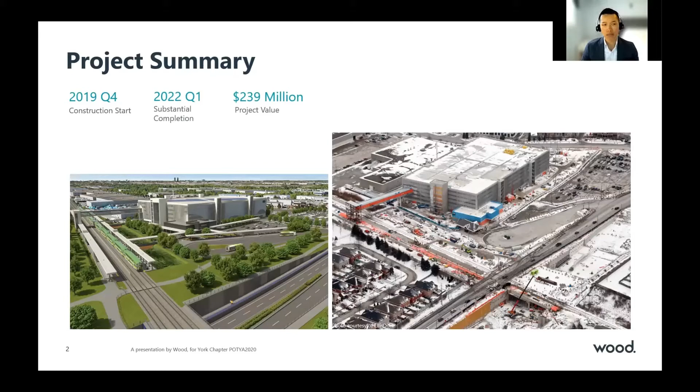Shown here is an overview of key project elements. Starting from the bottom left, there's a new parking structure with integrated station building. There's an updated parking lot layout, passenger pickup and drop-off area, and bus loop, all updated to provide ease of transition between travel modes. Again, the theme of improving and encouraging transit use is throughout.

There's a new rail bridge to separate road and rail traffic, right over here if you can see my cursor, to improve the flow of traffic along Rutherford Road, eliminating the need for vehicles to wait for trains. Adjacent to the rail bridge is a pedestrian bridge connecting the multi-use pathway on the north side directly to the station building. Along these orange lines is the multi-use pathway, and there are also on-street bike lanes, again to promote multi-use active transportation. There's a new stormwater pumping station to pump stormwater away from the depressed roadway during rain events to avoid delays on the road.

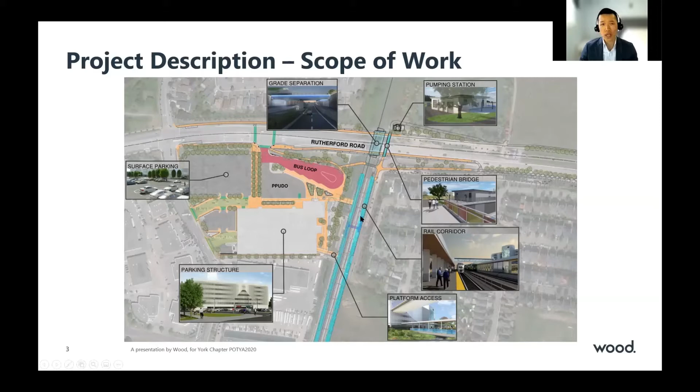Within the rail corridor, to accommodate the increase in train service, there's a new east track and a new east platform, with upgrades to the existing track and existing platform.

In terms of impact to York Region and neighboring communities, the new station improvements and grade separation will encourage use of public transit and active transportation modes, meaning taking cars off the road. This ultimately improves network capacity and connectivity, and quality of service for pedestrians, cyclists, transit users, and motorists. It also improves capacity and level of service for movement of goods along Rutherford Road.

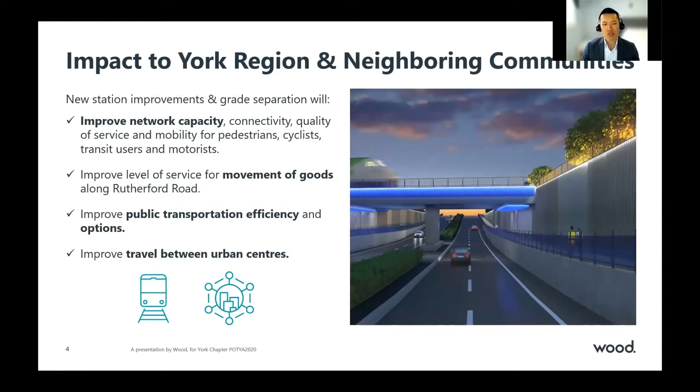Those are heavy trucks. The project will improve efficiency and options for public transportation. The increase in train service will improve travel between urban centers, essentially better connecting major cities along the Barrie Rail corridor all the way from Barrie to Toronto. By removing the existing at-grade crossing and eliminating the need for drivers to wait at the existing rail crossing, it will enhance community safety.

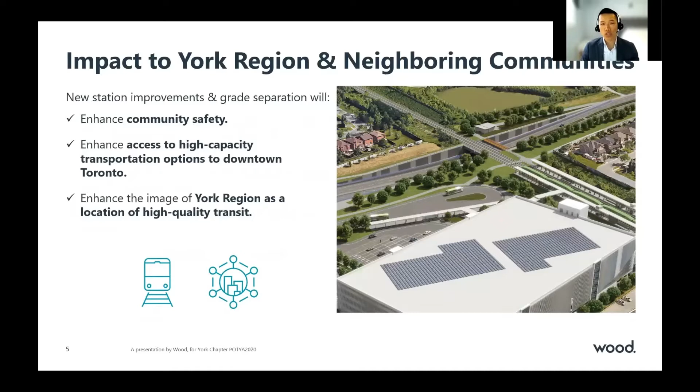This reduces potential collisions and delays to emergency vehicles. Increase in train service will enhance access to high-capacity transportation options to downtown Toronto, which means more access to jobs and growth. Overall, the project will enhance the image of York Region as a place of high-quality transit.

From an environmental and social sustainability aspect, the new station improvements and grade separation will provide safe and accessible stations that promote and encourage use of public transit and active transportation modes such as walking and biking. By reducing the number of personal automobile trips, we're moving more people with less energy, which will result in a reduction of emissions and the total number of collisions.

Also, by removing the at-grade crossing, it eliminates the need for vehicles to wait for passing trains, which enhances safety because you avoid rear-end collisions between cars and trains, and it also improves local air quality from lack of idling from cars waiting.

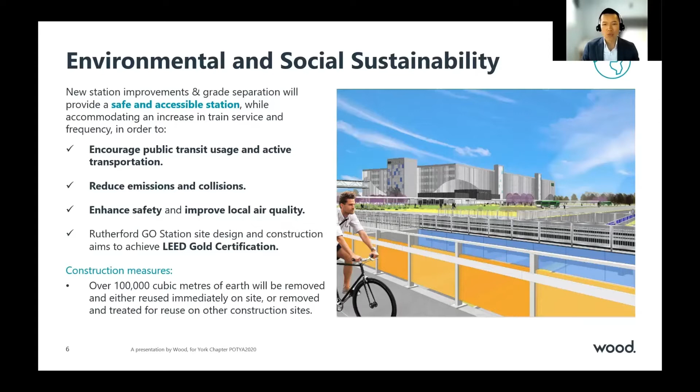The Rutherford GO Station site design and construction aim to achieve LEED Gold certification. I think we're more on track to potentially get Silver certification.

What sets this project apart from other projects of similar scope is the presence of an interlayered system of aquifers at the grade separation site. This is where we get into the technical merit and some of the innovation.

As shown on the screen, you'll see there are two aquifers. There's an upper aquifer consisting of sand and silt, and below that is a pressurized lower aquifer of sand and gravel, separated by an aquitard of silty clay. The pressurized low aquifer is sometimes referred to as an artesian aquifer.

This means the water in that aquifer is under enough pressure that when it's tapped, the water will reach the ground surface about 15 meters above. So under existing conditions, if you drill down here, the water will go all the way up to the road surface. As such, we had to optimize our design to compensate for the hydrostatic pressure, the uplift from underneath, and to avoid permanently depressurizing that lower aquifer.

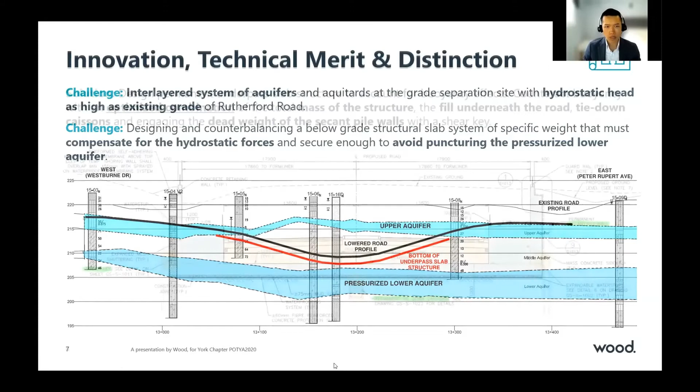One of the innovations and the technical merit we find is that to counteract buoyancy, our final design is an optimized combination of a total mass of a below-grade concrete slab structure, this tub structure here. It's inverted, so we refer to it as the tub. We also use the weight of the fill, the granular and the asphalt.

We incorporated permanent tie-down caissons to help bear the weight and resist the uplift pressure. Another final innovation was that we included shear keys to engage the weight of the secant pile walls that were originally intended for shoring for an excavation, but we designed them for permanent condition, engaging that weight to help resist the uplift.

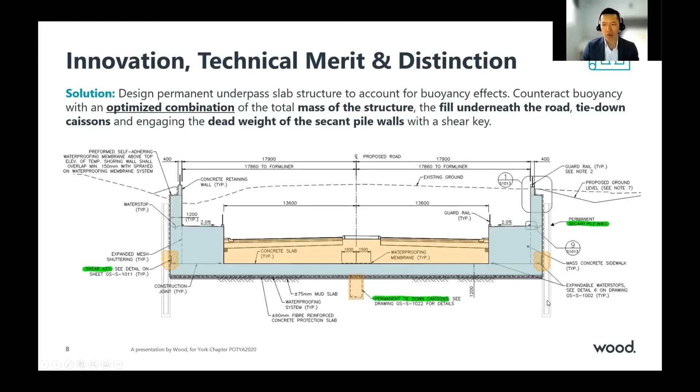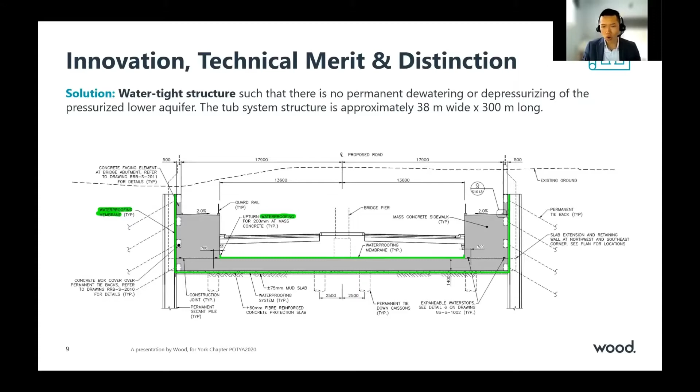So you can imagine, from the bridge out, 150 meters on either side of the bridge, is this tub structure. At the end, there are two vertical walls going straight up that prevent any water from going into the tub from below or from the side. The overall tub structure is approximately 38 meters wide to accommodate the new roadway, and it's about 300 meters long.

There's a quick video here showing the construction approach. It's actually a video rendering completed by Metrolinx. It's quick, so I'll try to go through it here.

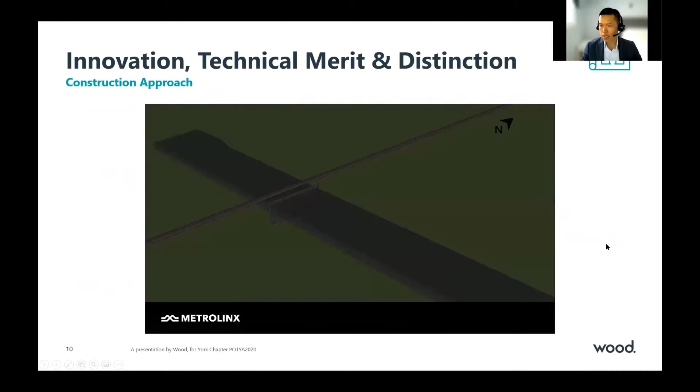As you can see, this is the site. The first step is the shoring system. Concrete piles are drilled to form the secant shoring to support the excavation, starting on the east side moving to the west, and you can see all the excavators working fast to excavate.

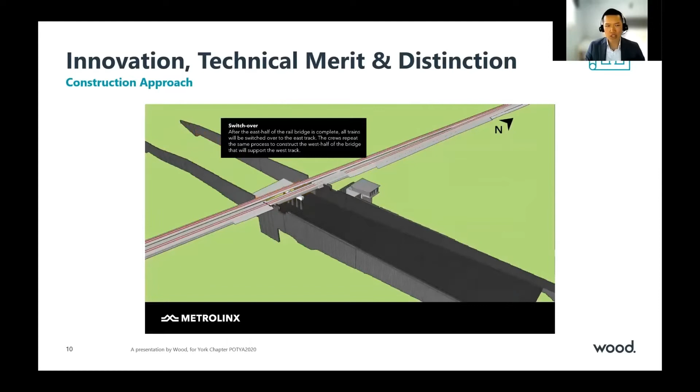At the same time, the rail bridge is being constructed. We install caissons for the bridge, form the abutments and piers. Excavation happens, and we construct the underpass slab structure, which is the black area and the gray you see there, with the uplift wall. Then the train traffic switches to the east.

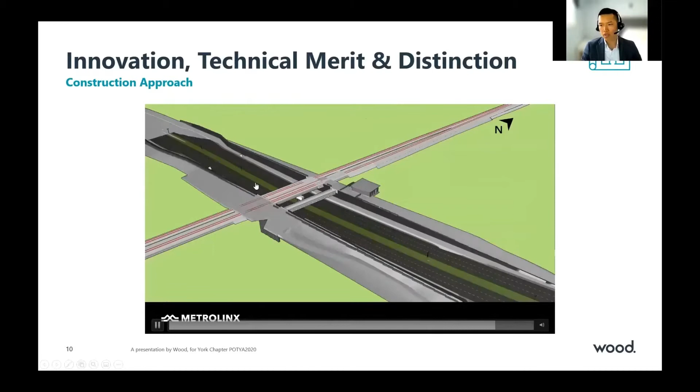The whole process is repeated on the west side. Pedestrian bridge built, road built. See? Two years of construction in 40 seconds.

A couple of videos here of current status. We have caissons, if you can see here my cursor - these are the drilled caissons that support the slab. This is all the reinforcing bar for the underpass slab, that tub that you'll see.

Here is some progress overview of the tub. Here you see the secant walls on either side. The enclosed area here is where the shear key is being formed.

In terms of commercial viability, the new station improvements and grade separation will accommodate an increase in train service and frequency, which help promote public transit use, and the grade separation will eliminate congestion at the existing at-grade road and rail crossing. Increasing train service will increase transportation capacity to support access for the growing communities in the surrounding areas. There's a lot of congestion within York Region along all the east-west throughways in the corridor.

And it's not always feasible to build more roads to expand the highway. We can't just add another highway. So what Metrolinx has found is that expanding the GO network, where there is property and room, is probably the most cost-effective way to increase transportation capacity versus widening or building more roadway. Because as you increase transit services, you get more cars off the road, which then builds more capacity.

As well, from a viability point of view, increased ridership will contribute to a rail system that is more self-sufficient by covering operating costs with revenue from fares.

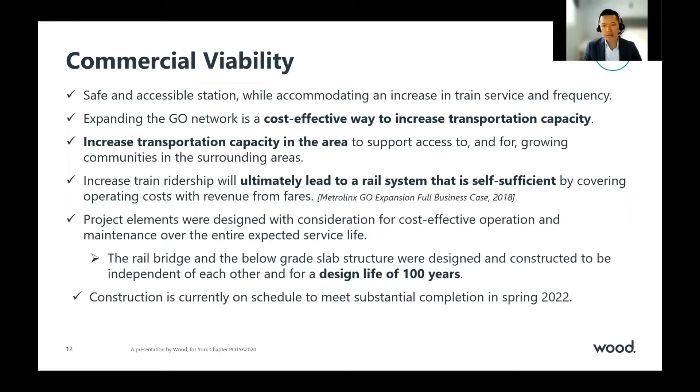Actually, just 20 seconds, I'll hit my last point: the project elements were designed with consideration for cost-effective operation. We designed the tub and the bridge independent of each other so they can be maintained separately without impacting each other, and they were designed for a life of 100 years. Thank you very much.

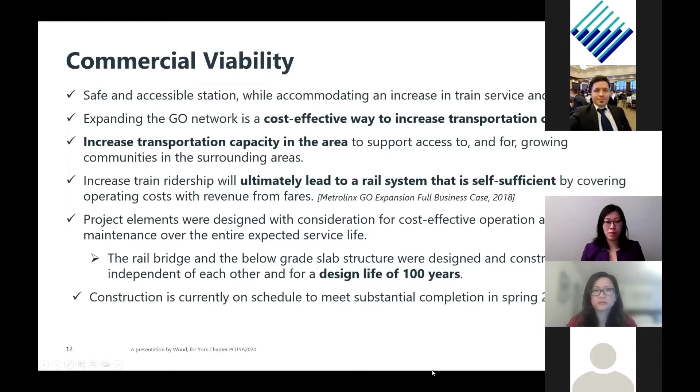John, hi, it's Marisa. Thank you so much for your presentation. I have a quick question for you. Is there any metrics that you can associate with the improved network capacity? Are there any numerical goals, or can you compare those metrics to other projects in terms of some of the improvements that will be possible because of this?

That is a great question, and from my transportation background, it is actually a very tough metric to analyze, because when you analyze an engineering metric, it's usually with very limited variables. When you have a lot of different variables combined, it is very difficult to come up with a metric. With a rail corridor, when you take people off the road, it's hard to anticipate the number of cars that can get off. Also in transportation, there's a phenomenon known as supply-induced demand—when you take cars off the road, other cars may come in as well. So we can always say we improve capacity, but it's hard to justify how much.

But from a Metrolinx number, there's a figure floating around—off the top of my head, by 2055 Metrolinx anticipates having 200 million riders on the rail corridor, and if you take that into consideration, that's a lot of cars being taken off the road. Based on that alone, it's hard to say how many of those cars are actually taken off Rutherford, or how many off the adjacent corridor, because this corridor runs from Barrie all the way down to Toronto. We don't know the aggregate effects of each of these crossings or station improvements. If someone tells you that's a set number, they're almost lying.

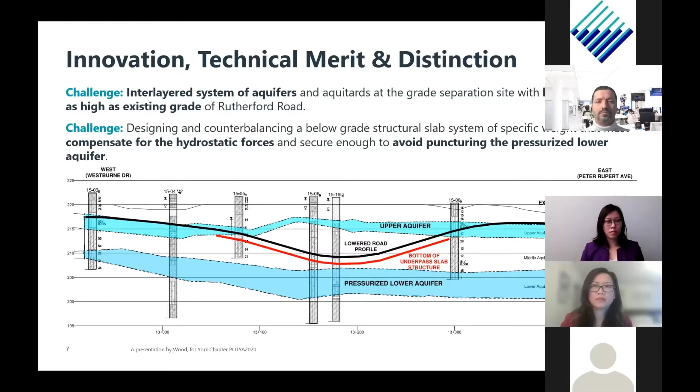So we looked at different options to minimize that risk during construction. Instead of having that 3.5 meter fill of road, we cut it down to about 2.5 meters, and reduced the tub thickness from 1.6-1.8 to 1.4. But instead, we had to incorporate these permanent tie-down caissons to help weigh down the tub, and engaged the shear key of the shoring. We haven't really seen something like this done before, but we looked at different ways to help expedite construction and reduce the risk of puncturing that lower aquifer.

At the end, we came up with about 53 of these permanent tie-down caissons spread across the length of this 300-meter tub. The caissons help resist tension and uplift to keep it down - imagine it's like an anchor. At the same time, the caisson has skin friction of the soil to also help resist uplift.

Combining all of this is an optimized combination to come up with this tub. You see this mass concrete here too - we added this multi-use pathway and made it really mass concrete for the weight to help reduce the width. The risk is you don't want to increase the depth too high either, because there's a limit on the vertical clearance between the top of the road and the bottom of the rail bridge - a minimum clearance you have to meet, and you cannot move the profile of the track. Rail has very tight restrictions on profile, so we tried our best to maintain that profile along the whole north-south.

I hope that answered your question a bit. Yes, thank you. No problem.

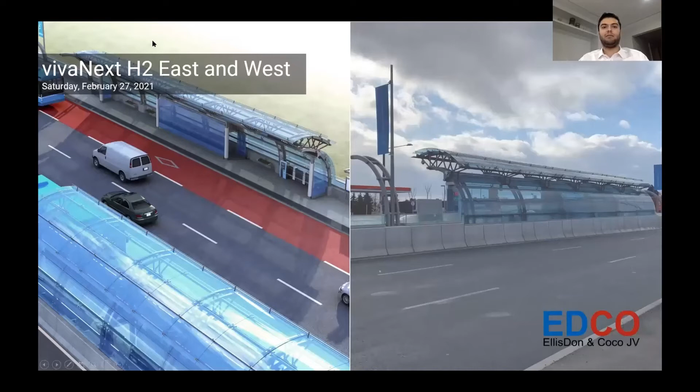I was introduced to EllisDon through an outreach event that I'll touch on later on. The vivaNext bus rapid transit H2 East and H2 West corridors of Rapidway are part of the broader vivaNext network that integrates into the transportation system, both in terms of transit operations and Viva stations, and was completed in January 2020 with a value of approximately $350 million. It was delivered under the design build finance model.

During today's presentation, I'll go over the project summary, innovation, technical merit and distinction, environmental and social sustainability, commercial viability, and the impact to York Region and neighboring communities.

Project summary. The two segments of the project site were about 5 kilometers apart and could be treated as different projects. The H2 West segment wound along Highway 7 from Helen to east of Edgeley. The H2 East segment wound along Centre Street from Highway 7 to Bathurst Street, Bathurst Street from Centre to Highway 7, and Highway 7 from Bathurst to the Yonge Connector Route.

The project consists of approximately 12 kilometers of rapidway and 10 stations. We widened multiple culverts, including the Humber River culvert under Highway 7, which required 34 bell ducts to be temporarily supported during installation. The corridor required extensive amounts of road and bridge widening to accommodate the dedicated center bus lanes. As a result, the project also involved extensive utility relocations and repairs to storm, sanitary, and water mains. Road and culvert widening and ramp realignment was also completed near the Highway 7 bridge over Highway 400 for MTO.

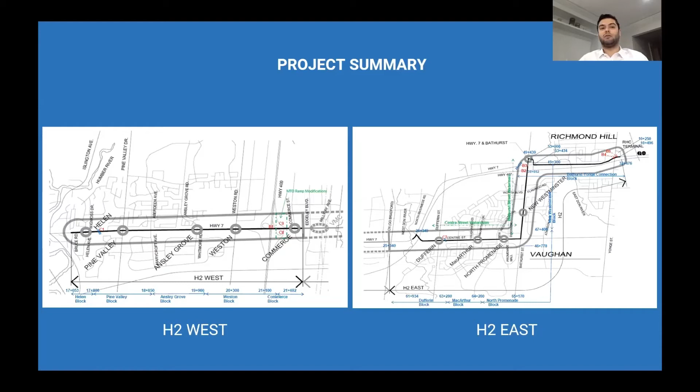In terms of innovation, technical merit, and distinction, working on this project enabled EllisDon's building sciences team to take challenges head on. Detailed traffic management plans were created as separate staging plans for each phase of the project, which required 2 live lanes of traffic for a majority of construction time.

Extensive traffic management was implemented along one of the busiest highways in North America to realign the southeast-west ramp from Highway 400 to Highway 7. We also implemented BIM to mitigate risks, especially for dry utilities. 5 utility agencies impacted by the widening works were Elexicon, Enbridge, Bell, Rogers, and TELUS. We also relocated water mains along Centre Street, Bathurst Street, and Highway 7. We were a recipient of 3 major awards, as you can see on the screen as well.

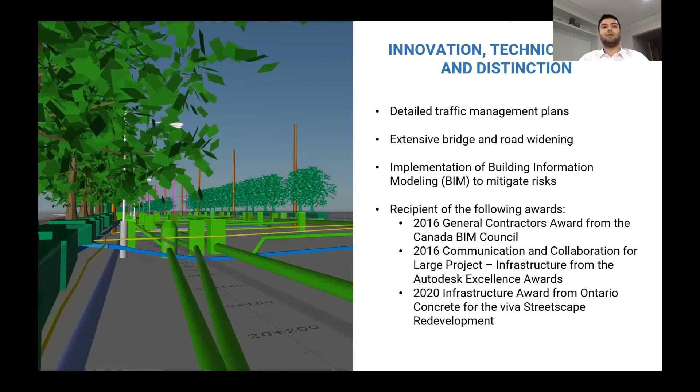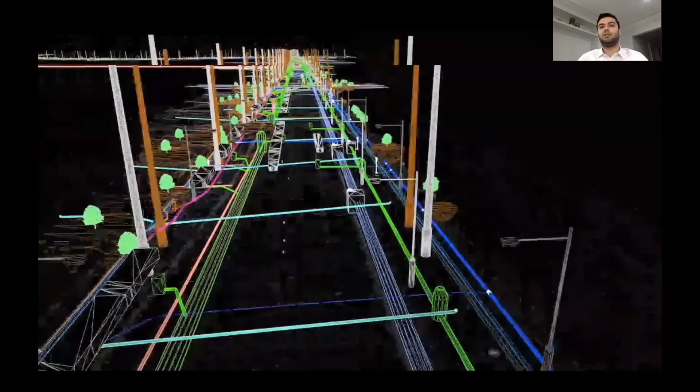This BIM video shows the H2 East segment, which starts from Centre Street and goes north on Bathurst Street. There were 1,500 test pits completed as part of the subsurface utility engineering investigation, and utilities were classified to different quality levels specified in ASCE 38-02. We modeled all the utilities to scale, introduced a standards table for clearances, and based on clash detections, the proposed alignments were finalized for the design.

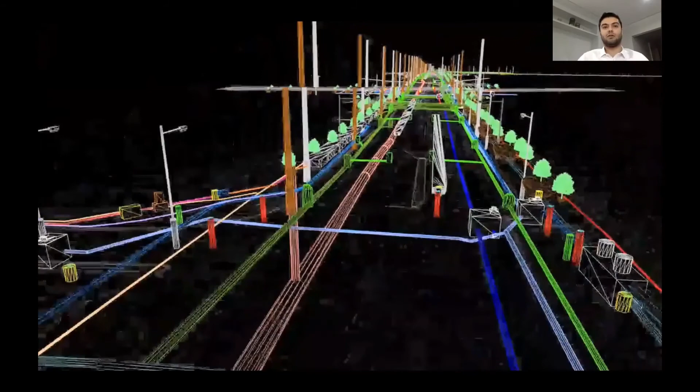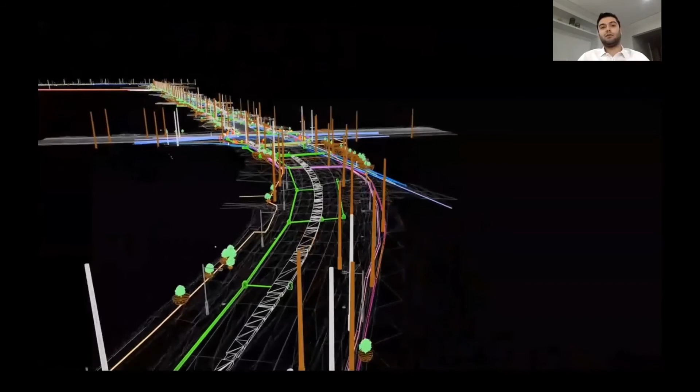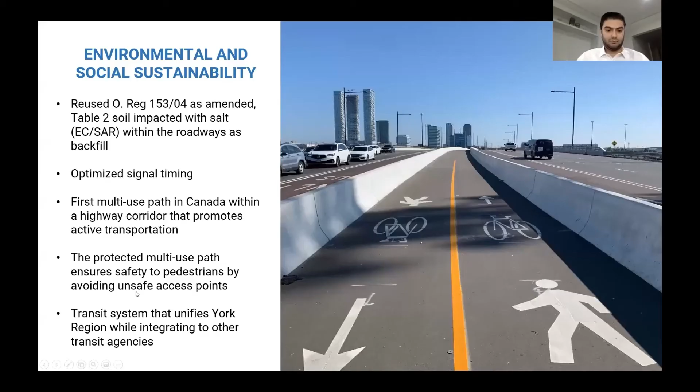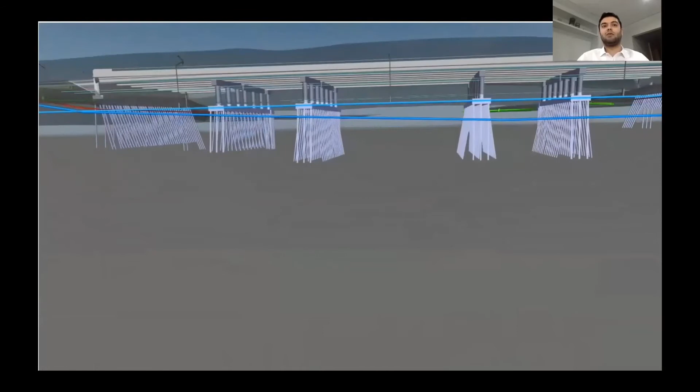The next BIM video shows the widening of Highway 7 over Highway 400. The bridge deck was extended by 10 meters with 4 new piers installed to the north, and the parapet was rebuilt on the south side to accommodate the dedicated bus lanes.

This is the widening to the north, and the strip in the middle is the multi-use path. Here's a picture of the multi-use path. In terms of environmental and social sustainability, we built the first multi-use path in Canada within a highway corridor that promotes active transportation.

The protected multi-use path ensures safety to pedestrians by avoiding unsafe access points. Previously, pedestrians would have had to cross the ramps since the sidewalks were on the north and south side.

Signal timings were optimized for the 30 intersections within the project limits in order to improve ITS within York Region. Züm Brampton Transit buses and the TTC are interconnected to the vivaNext network as a result of this program.

In terms of environmental impact, soil excavated across the project, specifically within the roadway that met the MECP Table 2 SCS, with the exception of salt, was reused within other excavated areas needing fill.

We did not treat the soil excavated as waste where there was potential to reuse it as fill across the site. This minimized the environmental impacts to the community.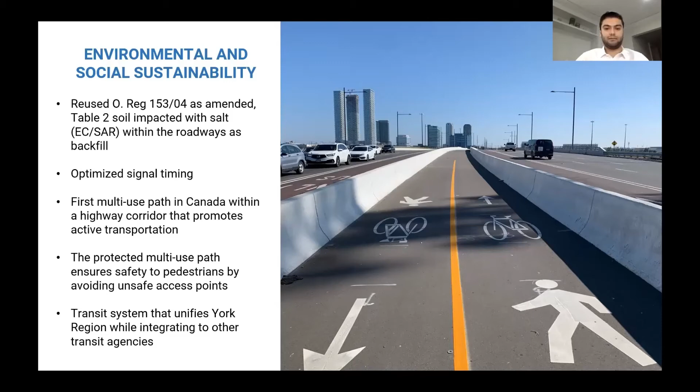Commercial viability.

Local outreach events were held in Thornhill and Woodbridge, provided employment opportunities to those who want to work in York Region, which is how I got my start with EllisDon.

In addition, exposure to the construction industry was made available to students through intern placements on the project sites. At any given time, there was a workforce presence of 150 workers.

vivaNext H2 East and West was completed on time and ahead of schedule using advanced methods such as 4D scheduling techniques. A lot of the optimization and logic changes of our schedule were implemented using the 4D method. Vehicle and pedestrian access to businesses were also maintained at all times.

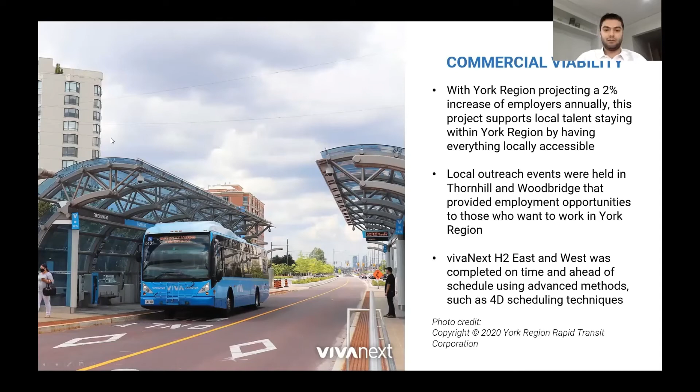Impact to York Region and neighboring communities: reduction of traffic congestion by implementing fiber connection to York Region's transit network.

According to the 2019 Ontario Road Safety Annual Report released by MTO, 23% of collisions can be attributed to turning movements. Introduction of a fully protected left turn phase mitigates the risk of these types of collisions.

As part of the ramp realignment works, the advanced transportation management system for the MTO was enhanced as well. Coordination with private developers regarding design and construction schedule was required for the ramp realignment for improved and continuous traffic flow in one area.

Also during the pandemic, which we got 3 months after substantial completion, the bike lane is also being utilized as an extension to the sidewalk to help promote social distancing.

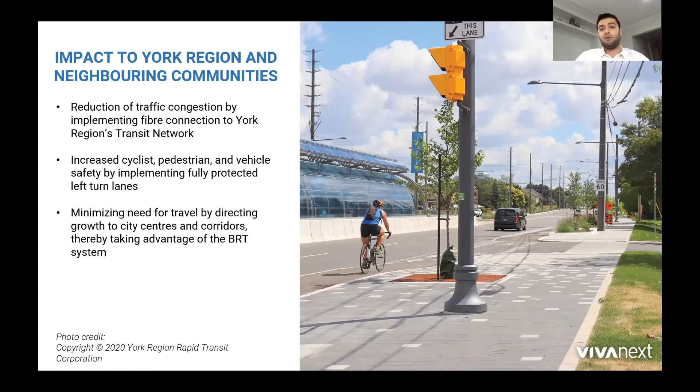Infrastructure is the future of construction, and only 10% of infrastructure projects are completed on time. vivaNext H2 East and H2 West was one of them. If the judges have any questions, I'll be happy to answer.

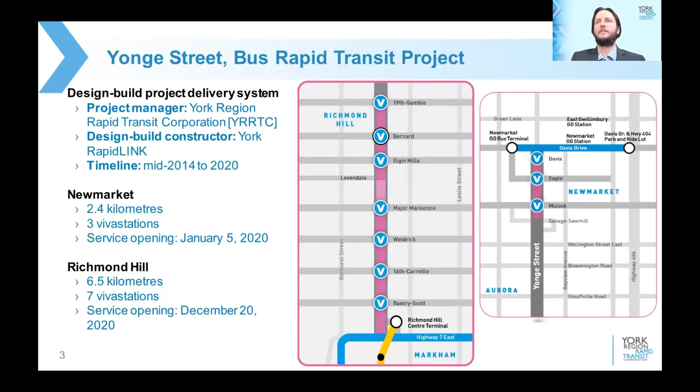For the Innovation, Technical Merit, and Distinction category, we focused on our utility relocation program due to the complexities we experienced and the unique plans and solutions developed through the course of the project.

Yonge Street is the most historic and heavily traveled corridor in York Region, with a complex network of existing transmission and local distribution utilities that were in conflict with the proposed infrastructure. This required approximately 95% of all existing utility plant to be relocated, with a projected cost of $220 million. To put this into context, this 9-kilometer project required more utilities to be relocated than all of our other vivaNext projects combined within the 34-kilometer phase 1 network.

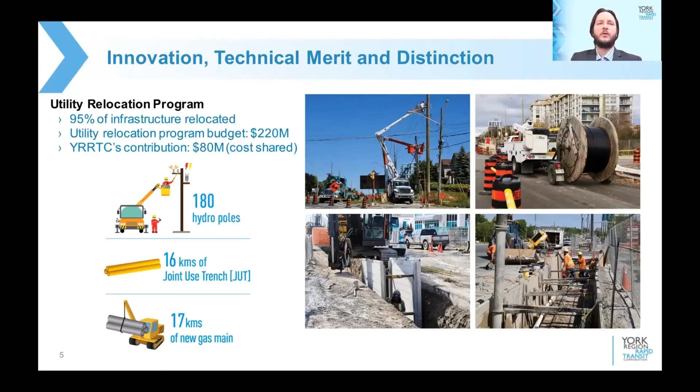Our strategy required the relocation works to be sub-segmented based on conflicts, utility service areas, and available project space to enable parallel utility relocation work and maximum contractor density.

To enable this schedule compression, we developed a corridor management plan to maintain individual constructor responsibilities, as the utility relocation work was self-performed by each of the respective utilities. This ensured that the owner did not become the constructor. This plan included a number of tools and processes to maintain the time and space requirements, which was ultimately accepted by the utilities and the Ministry of Labor through extensive consultation.

Over the course of the entire 3 years of the utility relocation program, with more than 12 different active constructors performing work on behalf of the utilities, the project did not receive any notices from the Ministry of Labor.

I also wanted to mention that these innovative plans and processes developed through the course of the Yonge Street project have been shared within the industry and adopted by other similar projects. In addition, the principles have been included in Transportation Association of Canada's P3 Utility Coordination Guideline that will be published shortly.

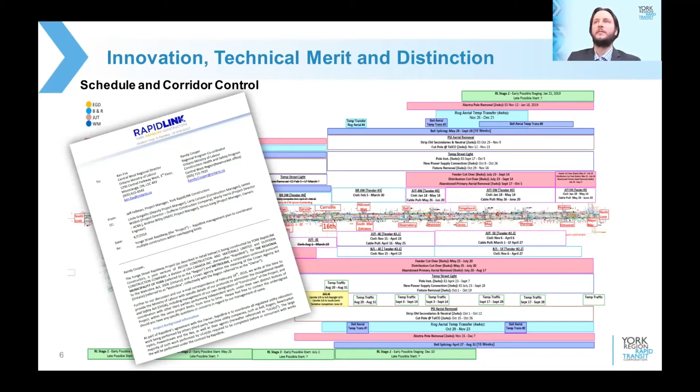As a result of the limited subsurface real estate within the corridor, and to avoid sequential work, we collaborated with 3 major utility companies—Alectra, Bell, and Rogers—to install their new plant in a joint use trench. This was the first time these utilities had partnered in a JUT for a reconstruction project, requiring a completely new implementation strategy for the design, tendering, and construction.

The tender process was especially challenging, as each utility had very different procurement practices, contract templates, pre-approved contractor lists, and administrative procedures. YRRTC was able to develop a procurement and administrative model that maintained the utility's unique practices through a 3 quotes, 1 contractor system. This approach led to 10 successful JUT tenders awarded at an approximate value of $60 million.

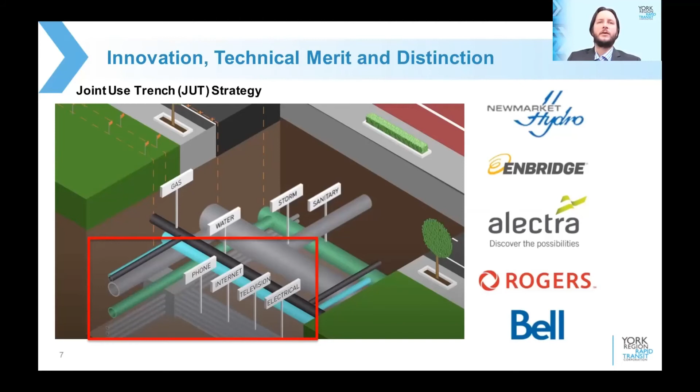Environmental and social sustainability: the foundation for our environmental responsibility was developed through the Environmental Assessment process, and acts as our formal commitment that we will leave the natural, social, and built environments better off than they were before. We've achieved this in a number of ways.

Over 4,000 trees and thousands of shrubs and flowers will be planted along the corridor in engineered planters, which include soil cell technology to increase the usable soil volume for maximum growth, creating an urban canopy in support of York Region's greening strategy.

The project also incorporated several low-impact development initiatives, including on-site stormwater infiltration through boulevard permeable pavers and tree planters. In addition, the project contributed to Lake Simcoe Region Conservation Authority's LID off-site projects to achieve the water balance criteria by offsetting the project's impacts.

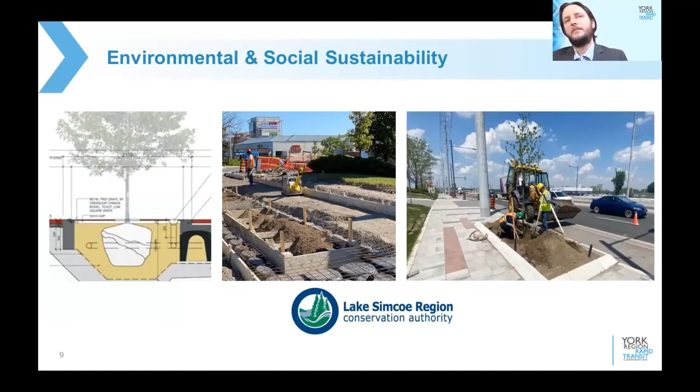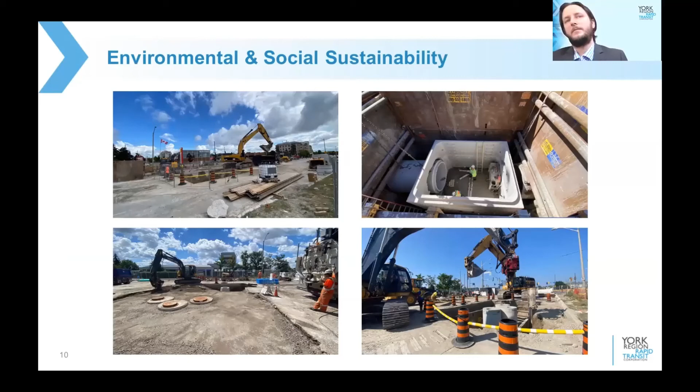The project's stormwater management plan included new and upgraded stormwater conveyance systems that can accommodate a 5 to 10-year rain event. 10 new oil grit separators provide the required quality control, one of which was over 10 meters deep, which you can see in the top right-hand corner of this slide.

Transit by nature is environmentally sustainable, and this project will give people the choice to get around quickly and conveniently without a car, benefiting the environment. One bus can replace up to 70 cars on the road. As recommended in York Region's pedestrian and cycling master plan, the project constructed nearly 20 kilometers of dedicated bicycle lanes to support active transportation, providing a complete street for biking, walking, and comfortable, reliable rapid transit.

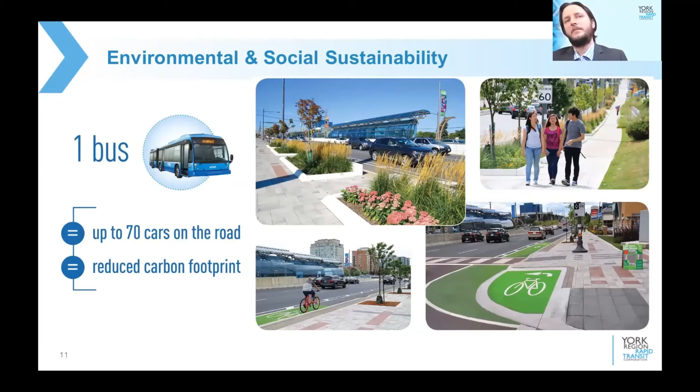Commercial viability: with York Region's population expected to increase from today's 1.2 million residents to 1.79 million by 2041, growth must be managed strategically to reduce suburban sprawl. The Yonge Street Rapid Transit infrastructure provides the foundation to accommodate planned mixed-use development to achieve complete communities. As we built the project, we expanded and improved essential infrastructure such as sewers, telecommunications, and water mains to meet long-term growth standards and capacities. Existing businesses were extensively supported throughout construction to maintain a vibrant and diverse commercial community.

Impact to York Region and neighboring communities: transportation and traffic congestion consistently rank as top issues for York Region's residents and businesses, so investing in rapid transit infrastructure is crucial. The Yonge Street project connects communities and improves the overall transit network in York Region and beyond. As you can see from the slide, the Yonge Street project is a central piece to the ever-growing rapid transit network being built.

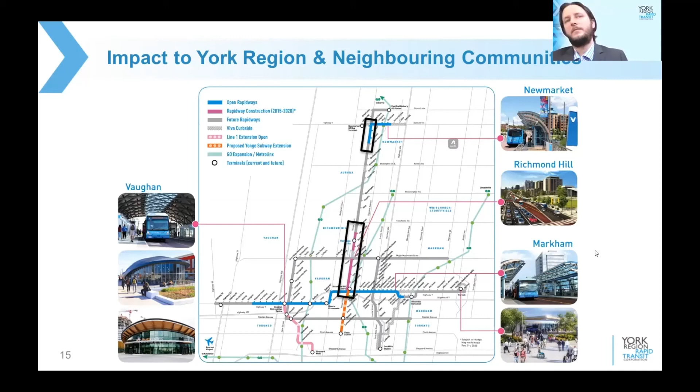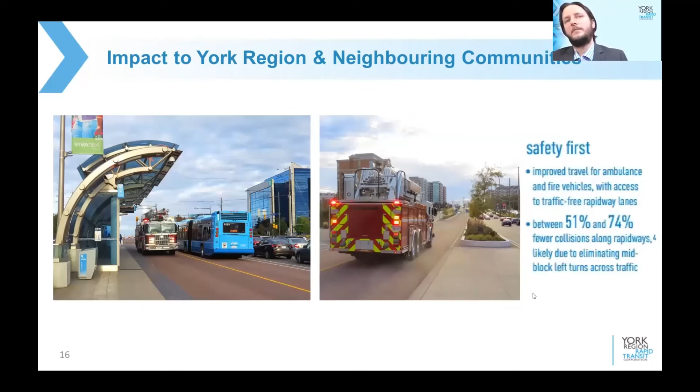The urbanization of Yonge Street will improve public safety and result in fewer collisions. On similar BRT projects, we have seen between 51% and 74% fewer collisions along the rapidways, likely due to eliminating mid-block left turns and upgraded, fully protected signalized intersections. The Yonge Street Rapidway also provides improved travel times and responses for emergency services with access to traffic-free Rapidway lanes.

The Viva Blue service along Yonge Street, which uses the newly opened Rapidway, continues to be the most utilized transit service in York Region. A 30% increase in operational efficiency and improved reliability are key to continued growth in ridership. The Yonge Street BRT will connect customers directly to the future Yonge North subway extension, York Region's top transit priority. The photos in this slide demonstrate the transformation of the Yonge Street corridor.

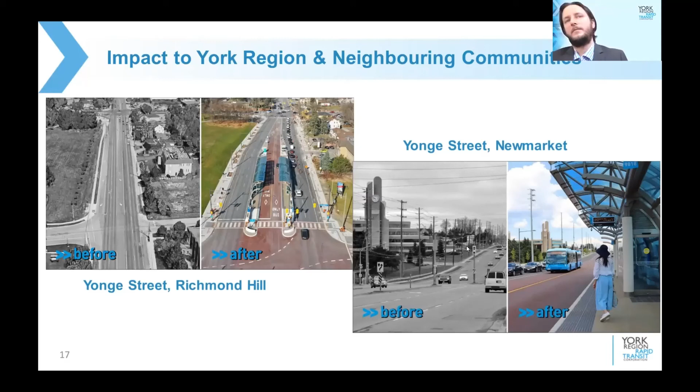The opening of the Yonge Street project was celebrated with a virtual media event on December 17th, attended by senior level staff and various levels of government, including the Minister of Transportation, Caroline Mulroney. This marked an important milestone, and it was the final segment of the 34-kilometer network in York Region, connecting key growth centers. These elements provide a fully integrated transit system connecting York Region's communities as well as neighboring communities throughout the Greater Toronto Area, resulting in reduced traffic congestion, increased productivity, and sustainable options for generations to come.